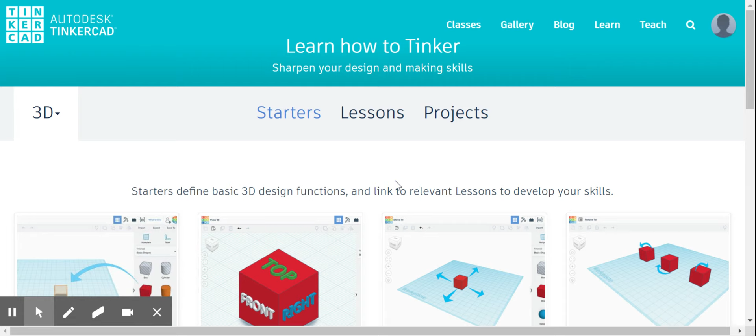I'm on my Tinkercad.com dashboard. I'm going to go up here to learn. I'm still in starters, it is our last starter lesson. I'm going to click on see all starters to open up the bigger menu.

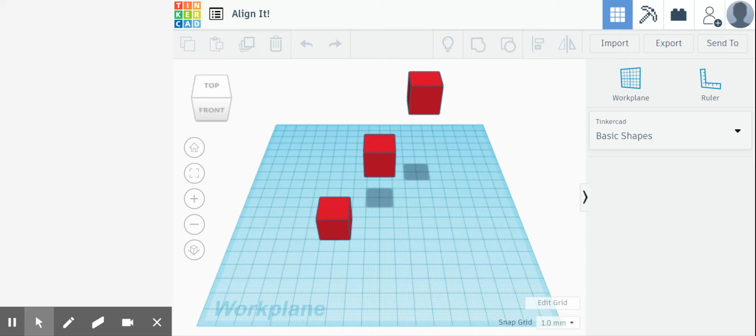And the last lesson, align it. To align something means to put it in line with something else. And this is one of the most important skills we're going to need for the rest of our projects for the summer. Okay, align it.

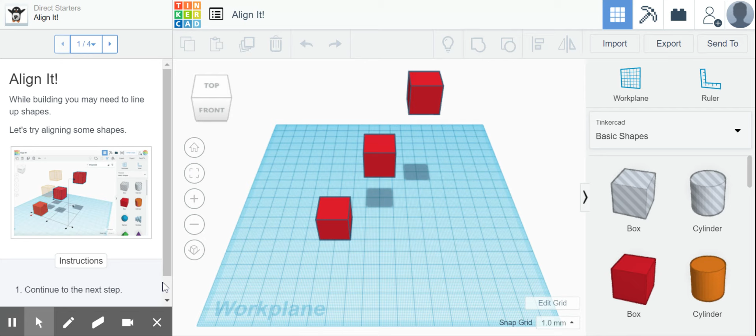While building, you may need to line up shapes. Let's try aligning some shapes. So we see that we've got 3 squares. Here's our work plane, here's the y-axis going up and down. We've got the x-axis going across, and the z-axis is the 3-dimensional one that goes up into the sky. And we want to put them all down straight in a row.

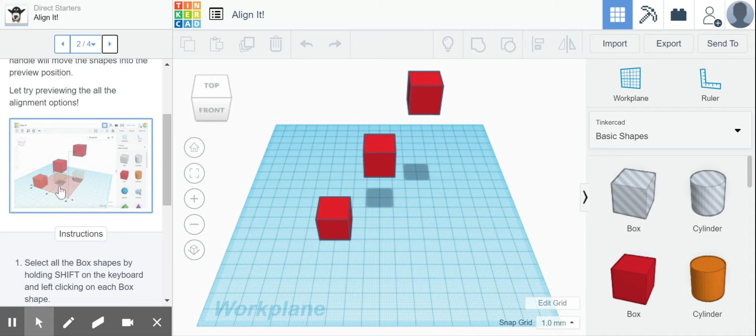Okay, so let's explore the different ways these box shapes can be aligned. Hovering over an alignment handle will show a preview of what the alignment will look like, and clicking a handle will move the shapes into the preview position. Let's try previewing all the alignment options, and it kind of shows us here what a preview is going to look like.

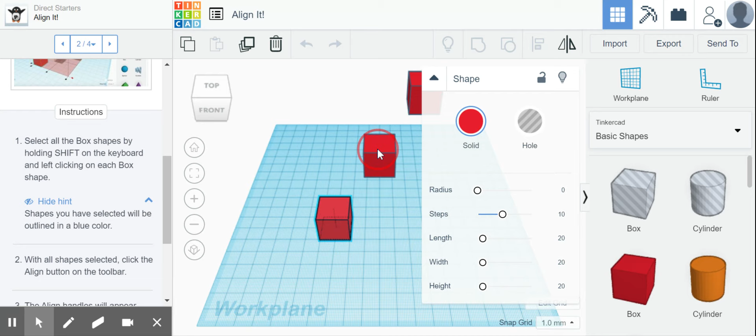Our first instruction says, select all the box shapes by holding Shift on the keyboard and left-clicking on each box shape. And look, there's a hint here: shapes that you have selected will be outlined in a blue color. So I'm going to click one box, and I see that blue outline it's talking about. I'm going to hold down Shift and click the other box, and now it says I've got 2 shapes. That's a good clue. And I'm going to click on my third box, and now it says I've got 3 shapes, so I know I'm in the right place.

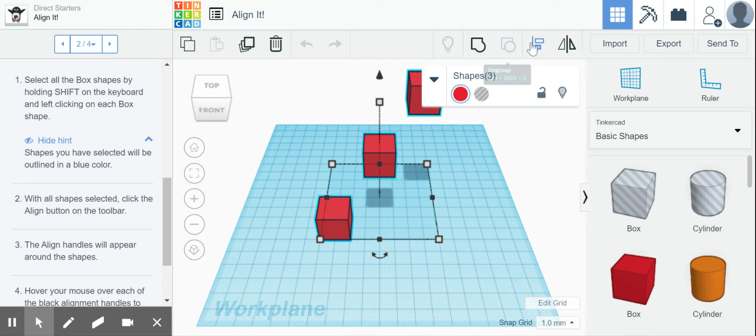I'm going to let go of the Shift key. That's very important. I'm going to get this out of the way just to make it easier. Okay, so now it's telling us with all the shapes selected, click the Align button on the toolbar. If you don't remember what they are, you can hover. So we've got Show All, we've got Group, Ungroup, and there's our Align. I'm going to click Align.

And now here are those align handles the direction was talking about. Hover your mouse over each of the black alignment handles to see a preview of the alignment. So if I just hover, not click, it's going to show me. If I click here, here's where they're going to move. They would all align to the top of the y-axis.

Here, they would align to the center of the y-axis. Here, they're all at the bottom. I think that's what we need. Then I've got my x-axis alignment, all on one side, all on the center, all on the right. And then this one you can see going kind of up into the 3rd dimension is that z-axis going up and down. So this puts them all flat on the work plane.

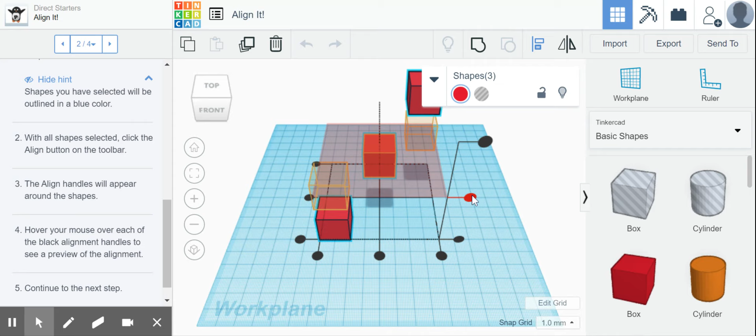This puts them kind of hovering along the middle, and this one puts them all the way at the top of our grid. So we want to align to the bottom, and it's showing me in this picture. I want them all in the front of the x-axis and flat on the work plane and the z-axis. Okay, so we know now that clicking on any of them will put them in the right spot.

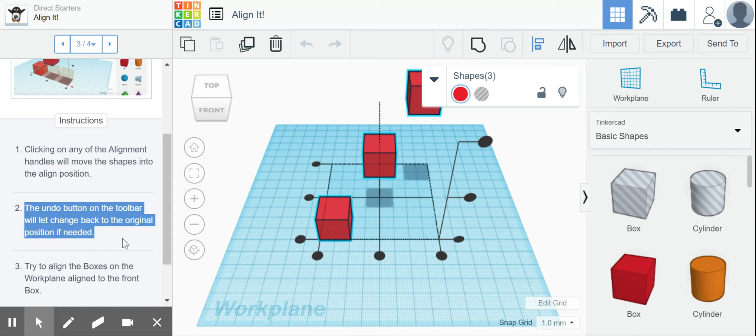And here, this is so important, that undo button will fix whatever you've done. So let's see, I want them all in the front, so that's going to be right here. So now they're all in the front, but now I need to change them on the z-axis, which remember is going to be this one.

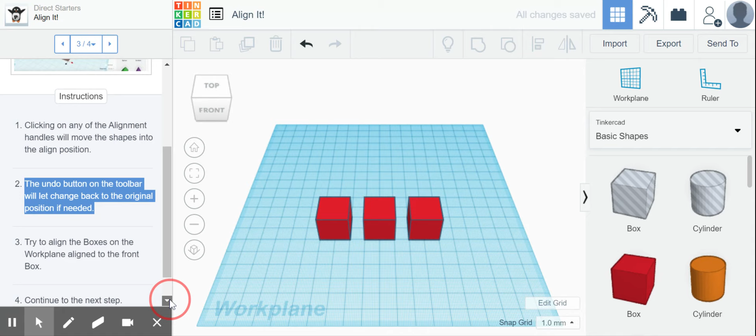So this is all the way at the top, that's not what I want. This one is in the middle, that's not what I want. Now I've got all 3 of my boxes in a nice straight line on the work plane on the bottom level of the z-axis. Okay, I'll be looking to see if I see 3 blocks all in a row on your page.